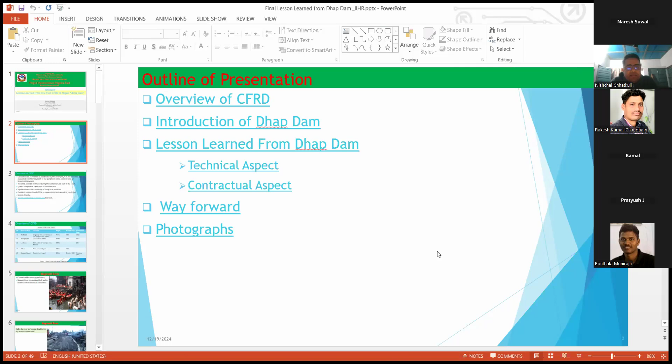Hello. I think Mr. Nishchal is having a technical issue with Zoom. I think he will rejoin shortly. Mr. Rakesh, can you please handle this? Yeah, I think he has joined. Yes.

And in the meantime, we can welcome our guest. Come on.

Okay, I think during his absence, I can briefly introduce our panelists for today's discussion. So the first panelist would be Mr. Naresh Suwal himself.

He's also the prime moderator of the session and a panelist for today's discussion. He holds a PhD, currently pursuing it at Louisiana State University, with research focused on applying machine learning and deep learning to geohealth. He has extensive experience in water resource management, particularly optimization and hydrological modeling. He has published several articles in peer-reviewed journals, most related to multi-objective optimization of reservoir scheduling, so his expertise will be useful in discussing problems related to multi-objective optimization of reservoirs such as the Dhap Dam.

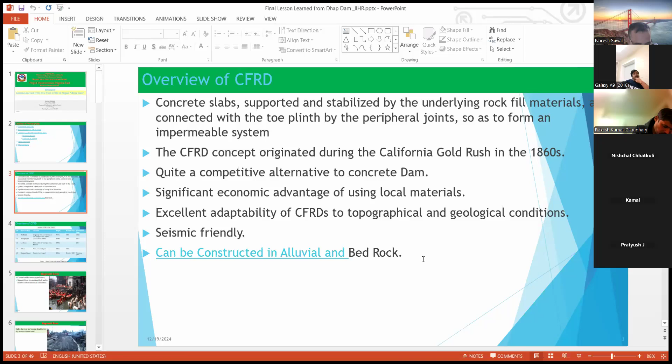This is just an overview of CFRD, which is being constructed worldwide, having heights of more than 200 meters. This is just an example I have shared - a 233-meter high CFRD was built in China, which was started in 2003 and completed in 2008.

Similarly, another dam having 219-meter height was built in China. Another 209-meter dam in Mexico, 205-meter in Malaysia, and 202-meter in Brazil. These are just examples you can find on the internet also.

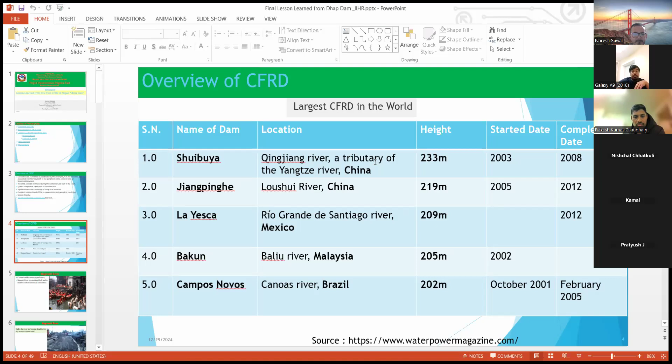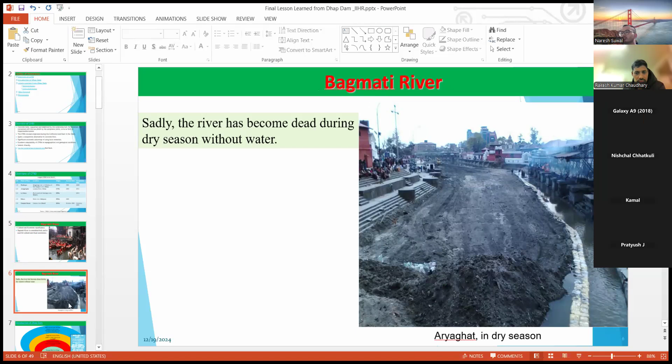To overcome these issues, various efforts have been made by the government of Nepal and other agencies. The concept of the Dhap Dam originated a long time ago. Basically, Japanese water agencies carried out different studies for the water resource management of Kathmandu Valley.

Based on that, the Bagmati Action Plan was prepared and issued by the government of Nepal in 2009, with a time horizon from 2009 to 2014. Now it has been updated, I think from 2022 to 2024, and it is under the approval process from the cabinet.

Based on the Bagmati Action Plan, a pre-feasibility study of the Dhap Dam was carried out by the Danish Hydraulic Institute in 2013. Based on that study, design and construction of Dhap Dam was started in 2015 under the BRBIP, Bagmati River Basin Improvement Project, with loan assistance from ADB.

During the course of this construction, the government of Nepal also issued a water resource policy, which clearly mentioned the augmentation of dry season flow in the river through construction of reservoir projects.

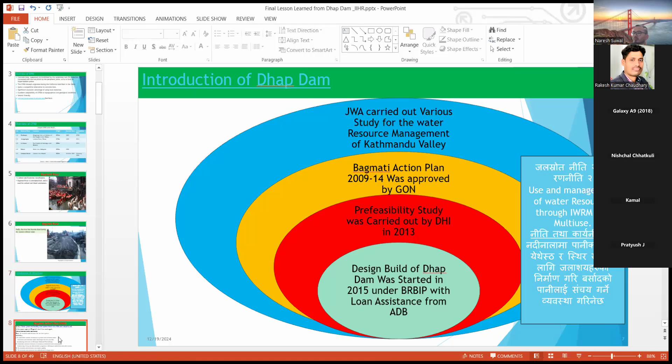This is just the summary of Bagmati Action Plan 2009. The vision is a clean, green, and healthy river system that is full of life and valued by all.

Under this action plan, activity 1 is to undertake various measures to protect and enhance water resources and increase water discharge into the river, like developing reservoirs in Sivapuri National Park.

Based on that, construction of Dhap Dam was started. Another main objective of Dhap Dam is to enhance the water resource and increase water discharge into the Bagmati River in dry season, and maintain and enhance the river water quality.

Another important objective was that during its concept, it was considered as the future backup for providing safe drinking water in Kathmandu Valley.

Immediately after completion of the dam and reservoir filling, we have started water barter between Kathmandu Upatyaka Khanepani Limited and Bagmati River Basin Improvement Project, HPCIDBC.

During the first water year, we have released water from Dhap Dam during the rainy season, because as we know, due to the devastating flood and debris flow in Melamchi River, the tunnel will not be able to deliver water in that period, and the scarcity of water in Kathmandu Valley is obvious.

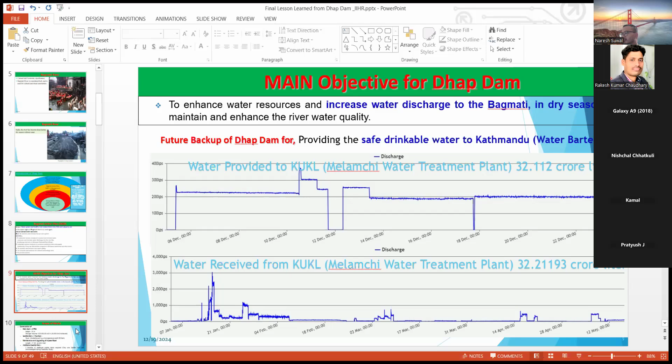This is the scope of Dhap Dam. It consists mainly of a 24-meter high concrete face rockfill dam, and the storage volume was initially 0.85 MCM, but later on, after completion of the dam, there was a sufficient increase in volume of the reservoir. It became 1.42 MCM. There was one saddle dam, since the dam was located on the ridge line between Bagmati Basin and Indravati Basin.

Initially, in the pre-feasibility study, one saddle dam was identified, but later on, while finalizing the topographical survey, the designers team from the contractor side identified two additional saddle dams, which were built by the contractor. We also have a 21-kilometer access road from Sundarijal to Dhap Dam.

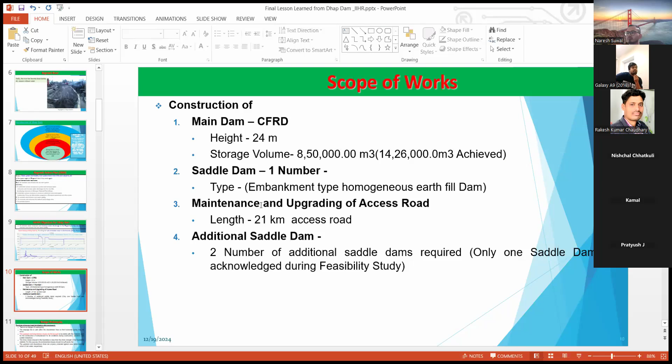The design philosophy of CFRD is that there is no danger of overtopping, and the seepage line is well within the downstream face so that horizontal piping may not occur. The upstream and downstream slopes are flat enough to be stable with the materials used for construction of the embankment under all conditions during construction, operation, and sudden drawdown.

For example, in the case of Dhap Dam, we have provided a 1:1.7 side slope, both upstream and downstream, whereas ICOLD has recommended only a 1:1.3 slope for this type of dam. But for safety purposes, we have provided 1:1.7 side slope.

The shear stress induced in the foundation is less than the shear strength of the foundation materials. For this purpose, the embankment slope should be sufficiently flat.

The upstream and downstream faces are properly protected against wave condition and the action of rainwater respectively. For example, we have provided a parapet wall over Dhap Dam, which will retain the wave back to the reservoir rather than allowing it to overtop.

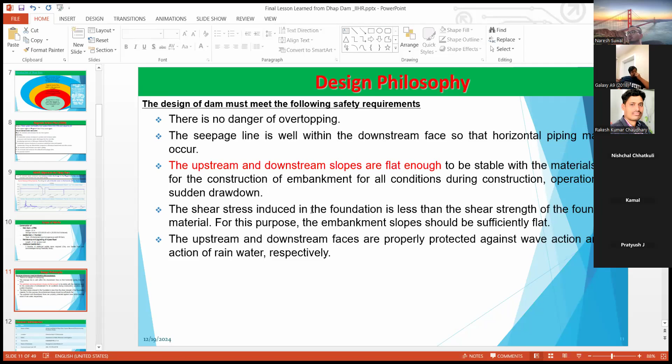This is the contract information about Dhap Dam. It is a design and build contract. The location of Dhap Dam lies in Gokarneshwar 1, Kathmandu, entirely within Shivapuri Nagarjun National Park. The client was the Department of Water Resources and Irrigation, and the contractor was Guangzhou Lama Raman JV. Around 51 crore was the contract amount, including VAT.

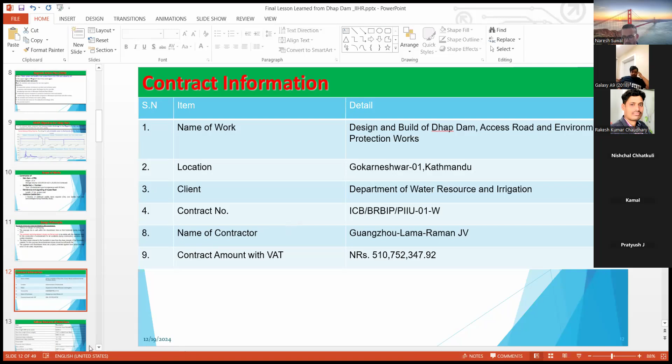This is the main feature of Dhap Dam. Dam height is 24 meter. Top length is 174.7 meter. Crest elevation is 2090.14 from mean sea level, and crest width is 8 meter. Thickness of face slab is 300mm, and dam volume is around...

51,000 cubic meters, but later on, due to increase in dam length, the volume increased. Normal water level is 2087.14, and freeboard is 3 meter.

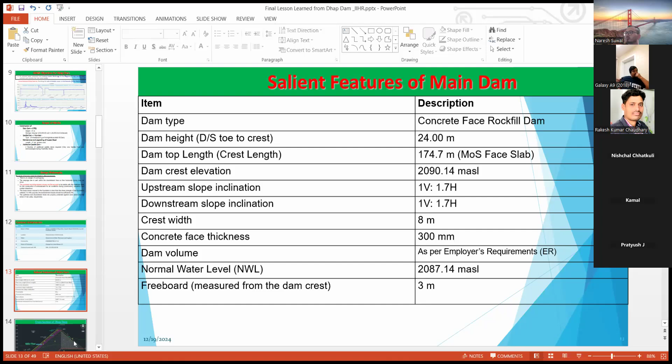This is the typical section of CFRD, where you can see the face slab in water face. This is the face slab.

This is the plinth level, and this is the ground profile. The main concept of CFRD is we need to have a competent bed to lay the plinth slab. As you can see here, there is deep excavation, and as you go towards downstream, you can see there is a slight decrease in excavation. So we can compromise the grade of rock while going downstream, but at the upstream where we are going to lay the plinth slab, the rock should be competent in strength.

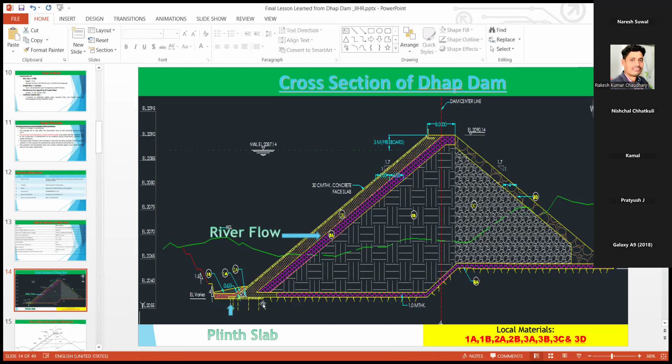These are the different phases which have been proposed during the construction. As you can see, from phase 1 to phase 7, because to optimize the resources and to materialize the design in an optimum way, this phase was developed, and to ease the construction also.

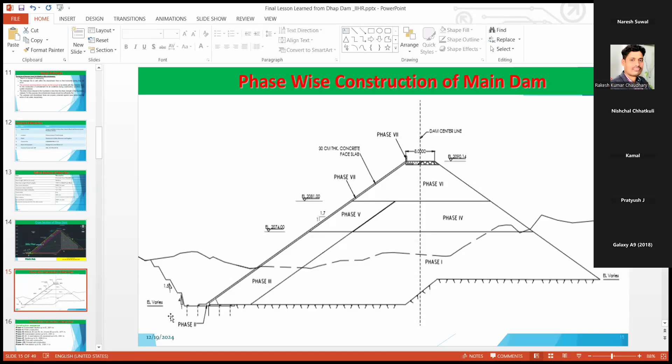These are the different activities that have been carried out under different phases. You can see from phase 1 to phase 9. So I'm not going into detail.

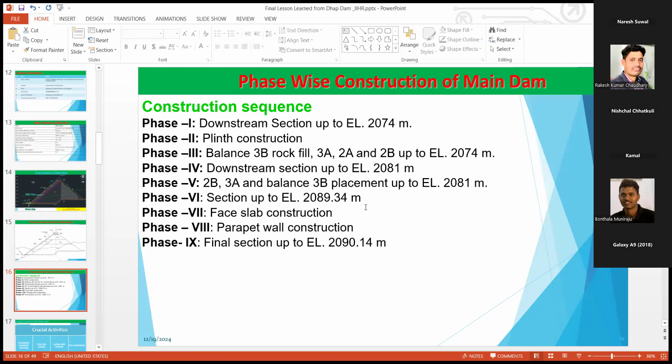Now I'm coming to the main topic of this presentation, lessons learned from Dhap Dam. In this slide, I'm going to highlight the technical aspect. In this aspect, the crucial activities that have been carried out are the foundation treatment, which is called grouting, similarly face slab casting, laying of joint networks, and instrumentation.

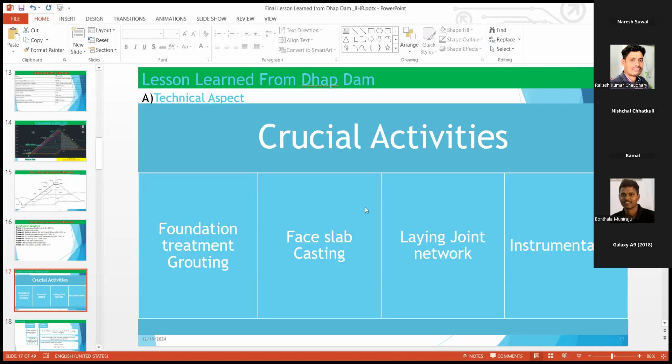Now coming to grouting, we have two types of grouting. One is consolidation grouting, and another is curtain grouting. Consolidation grouting mainly deals with the bulk property of the rock, and up to 5 meter depth we have applied consolidation grout in 2 rows, with hole spacing varying from 8 to 2 meters.

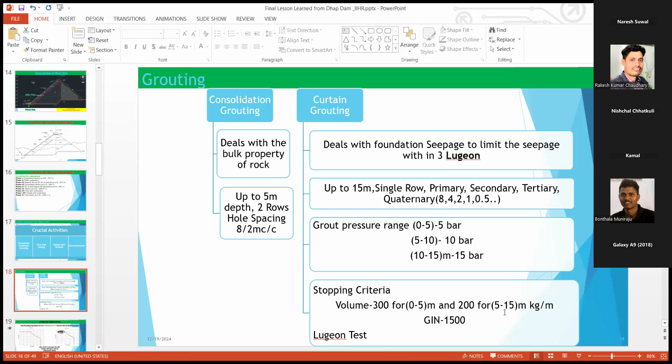Grout pressure was ranged at 5 bar for 0 to 5 meters, 10 bar for 5 to 10 meters, and 15 bar for 10 to 15 meters. The stopping criteria was based on volume: 300 kg for 0 to 5 meters and 200 kg for 5 to 15 meters. The grouting intensity number was 1500. A Lugeon test was carried out to confirm the permeability within range.

This is the envelope developed for the grouting, especially for curtain grouting. As you can see, grout volume on the x-axis and applied pressure on the y-axis. This envelope shows the characteristics of the rock. As you can see here, this shows the rock having fewer fissures, while this side shows the rock having more fissures.

In this area, we will control the grout take by volume, whereas in this area we will control the grout take by pressure.

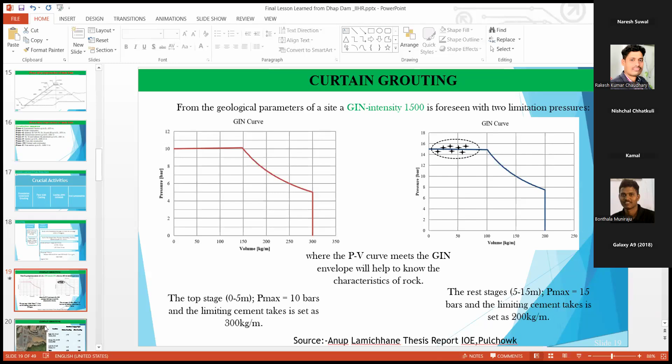This is the prediction of the grout performance. This research was done by Anup Lamichhane. At that time, he was a master's MSc student in geotechnical engineering from Pulchowk Campus. He carried out his research on Dhap Dam entitled 'Seepage Characteristics of Dhap Dam', and he predicted the grout performance before and after grouting, focusing mainly on three regions.

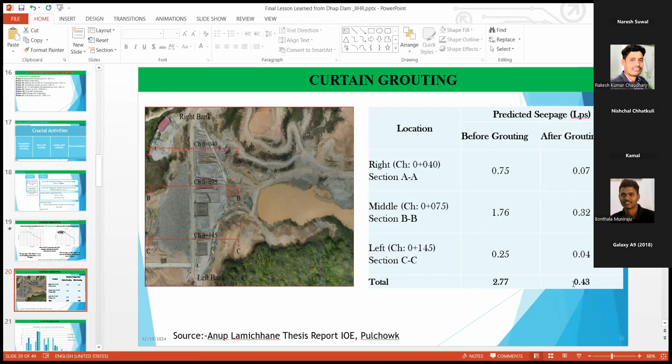Chainage 40, 75, and 145. This was the predicted seepage before grouting, and this is the predicted seepage after grouting. This graph was also developed by Anup. I would like to thank him. Now he's in the USA doing his PhD.

Here you can see the profile of Lugeon value. As you can see, we have the least Lugeon value before grouting in the right bank and mid section, whereas we encountered the maximum Lugeon value in the left bank and mid section. We recorded maximum Lugeon value up to 100 in the left bank.

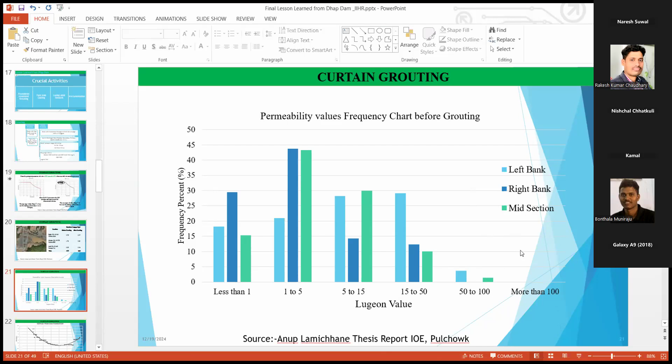This graph was developed by our office based on real seepage measurement downstream, from a device installed by the contractor at the toe of the dam. This seepage data was measured manually by our PIU team, and as the graph shows, there is minimum seepage in the month of March. This is the real seepage. There is increment in seepage before and after the dry season because of contribution of runoff from the vicinity of the dam and dam body, and there is no runoff during March. The real seepage is around 1 lps, which is considered safe as suggested by the experts.

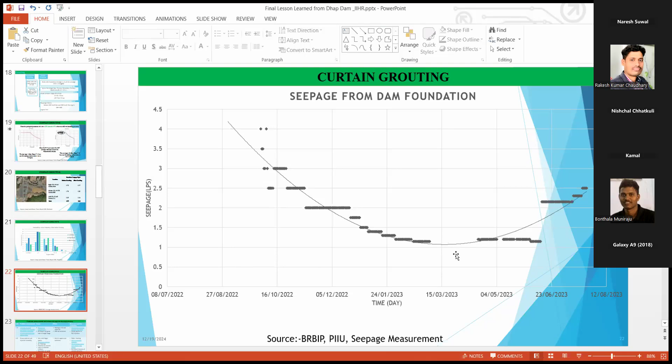Now coming to the various problems encountered and measures applied to resolve them during grouting. The first problem was leakage of grout material outside the plinth, at the interface of the rock bed and the plinth, and nearby holes. The main cause was removal of overburden, because due to difficulties in excavation by machine, the overburden between the border of the plinth line and existing ground was slightly removed.

From that portion, the grout exited out. Also, initially we drilled all grout holes at a single time, which was another main cause of this problem. The effect was wastage of grout material, because to achieve the desired Lugeon we couldn't compromise on pressure and volume, so a lot of material was wasted, and the required grouting intensity number was not achieved.

The main measures used for resolution: overburden was applied outside the plinth slab, we laid concrete in the open excavated portions, and grouting was applied in primary, secondary, tertiary and quaternary holes. We also reduced the spacing of grouting from 8 meters to 0.5 meter.

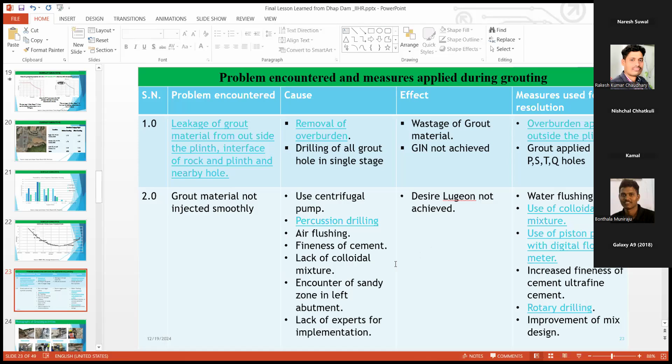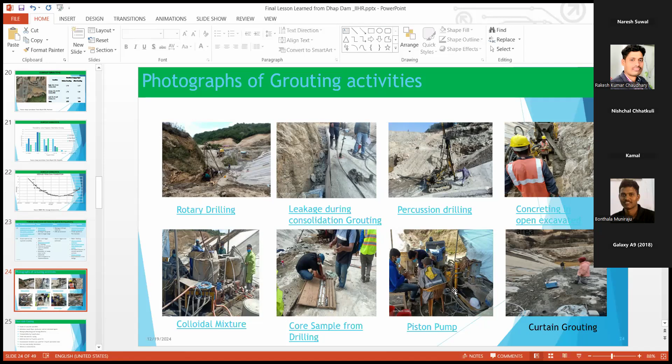As mentioned, this is the open excavated portion from where grout material exited. To overcome this problem, we applied concrete, pouring it in this area. This is the rotary drilling, and this is the percussion drilling which was initially used, later replaced by rotary drilling. This shows the concreting in the open excavated portion, and this is the colloidal mixer. This is the core sample taken from the grout hole, this is the piston pump used with a flow meter, and this figure shows the curtain grouting.

Now coming to face slab casting: the grade of concrete was B25, equivalent to M31.5 in British standard, having cylindrical strength. The admixture used was super plasticizer and air entrained agent. Mixing was done by a batching plant with a capacity of 25 meter cube per hour, transportation was done by transit mixer, and chute was used for laying the concrete. We used slip form for 9 panels out of 12 panels, and fabricated the slip form locally — I believe this was the first slip form used on an inclined surface in Nepal.

Conventional formwork was used for 3 panels and the starter slab. The starter slab is the slab cast in the irregular portion of the dam, because the dam was constructed in the river valley, which is not regular. For the regular portion, we used slip form, and for the other portion, we used conventional formwork by constructing the starter slab.

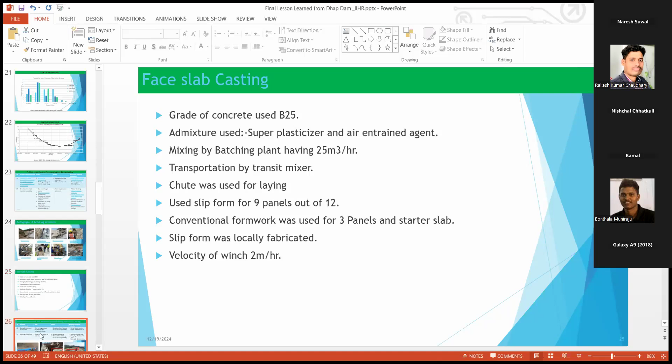Now coming to the problems encountered and measures applied during face slab casting. The main problem encountered was unequal movement of the slip form. The main cause behind this was use of a single winch and inappropriate alignment of the rail, which reduced the efficiency of the slip form significantly. For resolution, we used a double winch and made the rail alignment proper.

Another problem was uplifting of the slip form. The main cause was insufficient weight of the slip form itself, since initially we designed it to be lightweight in order to optimize the weight of metal. The effect of this problem was surface undulation in the concrete face, and reduced efficiency of the slip form. As a resolution, we added dead load to the slip form, as you can see the concrete block here.

We clamped the rail and slip form, and the movement of the slip form was slightly modified. Initially, the slip form was designed for continuous movement at 2 meters per hour velocity, synchronized with the initial setting time of concrete. Later, due to this problem and due to fall in temperature, it was very difficult to attain the initial setting time, so we modified the slip form movement from continuous to intermittent movement.

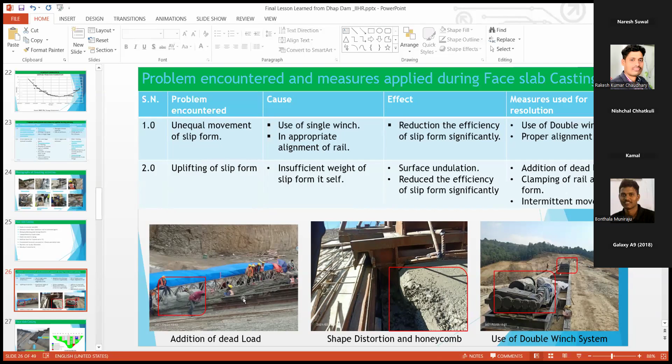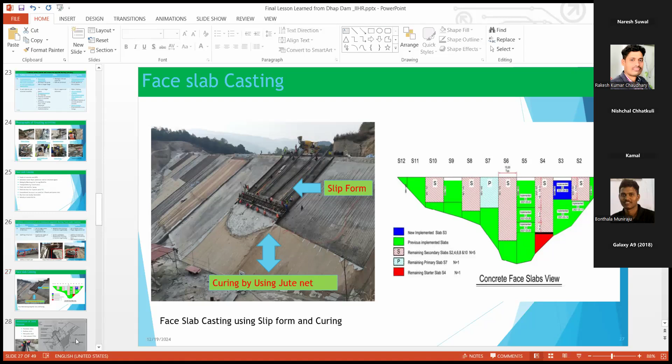Now coming to installation of the joint network, in Dhap Dam we have different types of joints. One is the perimeter joint, another is the vertical joint, and the last is the horizontal joint. Altogether we have a 733-meter joint network.

As I have already mentioned in my initial slide, the perimeter joint was constructed between the dam body and the foundation plinth slab. The vertical joint was constructed between two face slab panels, and the horizontal joint was provided between the face slab and the parapet. The function of the parapet is to return the water wave back into the reservoir, rather than allowing overtopping.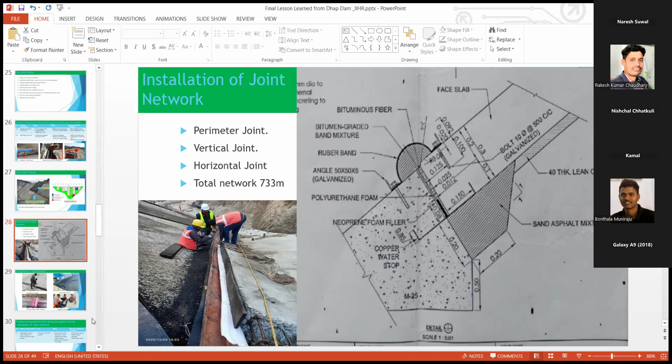Now I want to highlight the different activities during joint network construction. As you can see, the fixation of the angle and the rubber band. This is the completed part of the joint, and this is the joint construction phase. This is sand asphalt laying, and this is the W shape copper water stopper, and different stoppers were connected to each other by brazing technology.

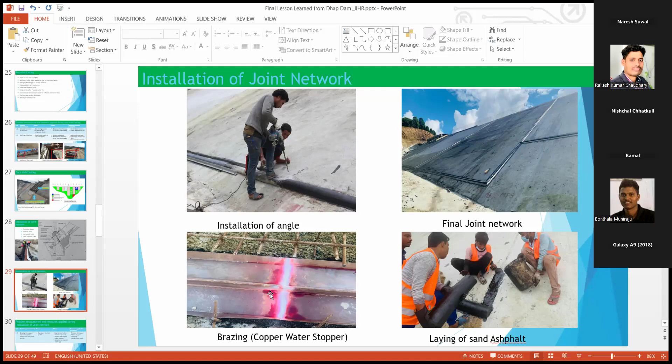The thickness of the copper water stopper was 1 mm. As suggested by code, we could use 0.8 mm thickness, but for this height of dam, we used 1 mm thickness copper water stopper.

The main problem encountered during joint laying was bending of the copper water stopper to match the plinth profile, because the plinth profile was aligned according to the shape of the valley, and there was a curvature in the plinth profile. The effect was a gap formed at the interface of sand asphalt and copper water stopper, and intrusion of concrete from this gap. The resolution was pressing the copper water stopper by applying compressive load, and the gap was fulfilled. Since the copper water stopper is a ductile material, we were able to fix this problem.

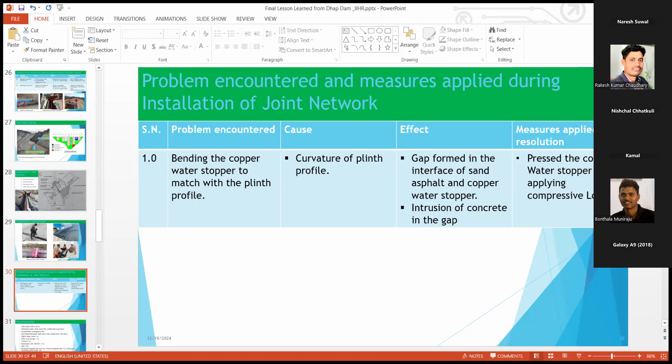Now coming to instrumentation, we have different types of instrumentation. There is joint meter, perimeter joint meter 4 numbers, and joint meter 4 numbers, and settlement points. We have 6 settlement points in the main dam, and 6 in each saddle dam, and we have 2 strong motion accelerographs.

One was installed at the dam crest, and another in the vicinity of the reservoir. We also have standpipe piezometers, 2 in the main dam and 1 per saddle dam. And we have a digital water level gauge and 1 water level gauge.

And we have installed a V-notch for seepage measurement from the foundation, installed in 1 of the dams. We also have a rectangular weir with RLS made at the downstream of the reservoir for measurement of the spill as well as the release. And we also have 1 automatic weather station set up in the vicinity of the reservoir.

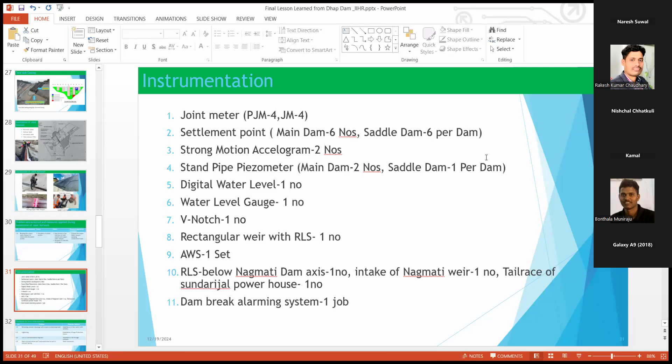Now coming to different problems related to instrumentation: we are releasing constant discharge with respect to declining head because currently we just have the Howell-Bunger valve. In this valve we control the flow discharge manually, and the probable solution is installation of a flow meter with actuator. We have discussed this many times with ADB and other experts, but they suggested this sophisticated instrument is not required for such a small dam.

Another problem is lightning. Because of lightning there is frequent damage to instrumentation; the probable solution is installation of surge protection devices. Another problem is lack of instrumentation engineers, because in government entities such manpower is not provisioned, so deputation of an instrumentation engineer through contract is essential.

Another problem is data communication and transmission due to lack of internet facility, because the dam lies entirely in the park area and there is no reliable network of telephone and internet. To solve this problem, we are discussing with Nepal Telecom for installation of an NTC tower there.

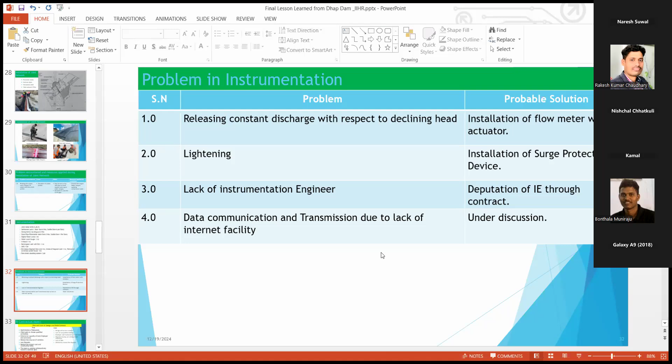Now I have concluded the technical aspect, coming to contractual aspects. This is the pros and cons of design build contract, where the pros are optimization of resources, client gets to choose qualified contractor, enhanced capacity of local employer and contractor, reduced chances of variation, fewer disputes, reduced project cost and construction time, and the team working collaboratively towards a common goal.

Cost of design is comparatively less than individual design, whereas the cons are design will be less creative, because the contractor will try to optimize resources and use less input for the design, since every private sector wants to make profit. With fewer resources used for design, creative design will not be achieved. There is also a lack of competitive bidding, because we have very few competitive contractors for this type of contract.

Employers and contractors are less familiar with each other, because we have faced many problems during construction of this dam, and we have taken input from different experts across the world, and have to depend heavily on the design build contractor. There is also a lack of standard bidding documents for this type of contract, and it's difficult to resolve disputes, because during construction of Dhap Dam we still have a couple of disputes under the process of resolution from the Supreme Court.

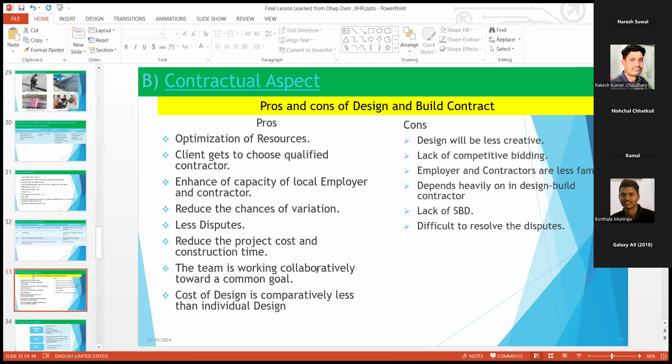The main problems faced during contract management were site possession, variation, price adjustment, and changes of designer and engineer, because during the course of contract management there was replacement of the engineer, which was very difficult for us to implement the contract. The main cause behind this problem was delay in approval of tree cutting, ambiguity in contract documents, and ad hoc decisions from the oversighting agencies.

The effect was time and cost overrun and disputes arising. Measures applied for resolution were EOT (extension of time) granted, and price adjustment was applied as per contract. The dispute resolution mechanism was functional during the contract management phase.

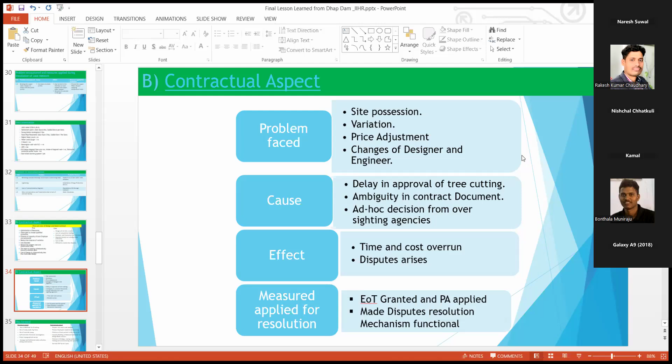Now I'm coming to the way forward. For the technical aspect, following are the ways forward from our side based on our experience and lessons learned from the Dhap Dam. One is the use of GIN plant for grouting. GIN plant is a very sophisticated plant used for proof grouting.

The main function of this plant is to optimize the grout volume, and the efficiency of grouting will be achieved by using this plant. Also use of ready-made slip form, use of concrete form, and sufficient geotechnical investigation, because this investigation makes it easy for us to optimize grouting, other foundation treatment, and design.

And proper topographical survey, because in the park area we were not able to conduct a proper topographical survey during the feasibility study. Due to that reason, later on while designing the dam, two additional saddle dams were encountered, and the contractor has also built those saddle dams, but that issue was under dispute and in the process of resolution.

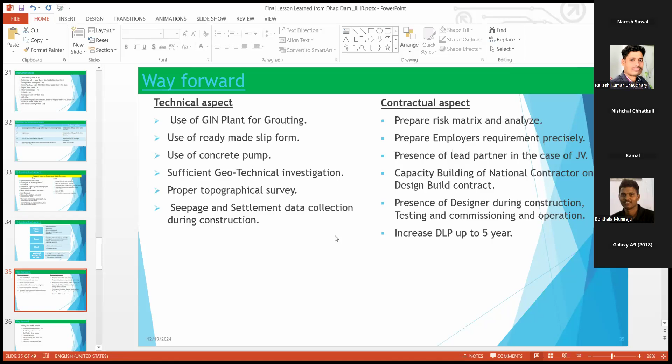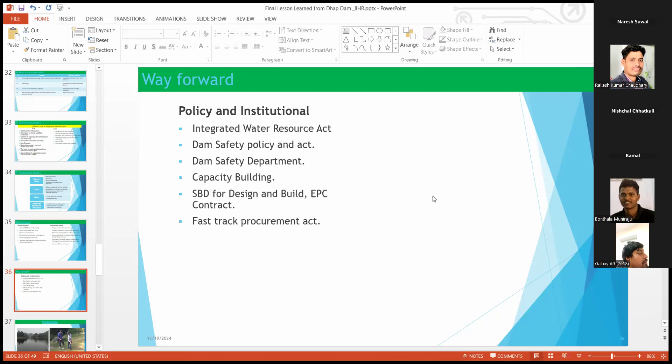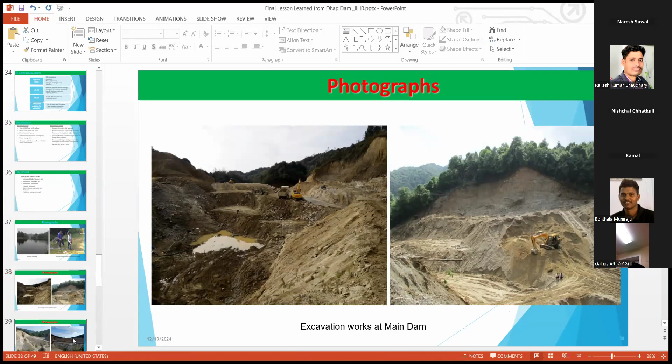This photograph was taken during the foundation, and you can see the progress of the dam. And this is 3A materials, this is 2B materials, and you can see the different stages of the construction. And this is the plinth slab.

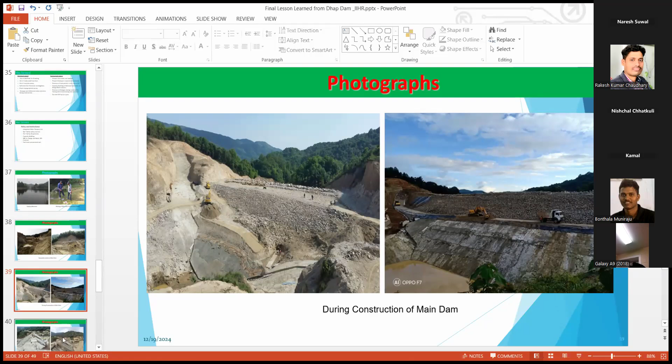This is the temporary diversion. This is permanent release, permanent outlet, and where you can see the casting of foam. This is the spillway.

These are the different face slab panels, and you can see also the joint networks, as I have already mentioned in my previous slide. Here you can see the final shape for the first CFRD of Nepal.

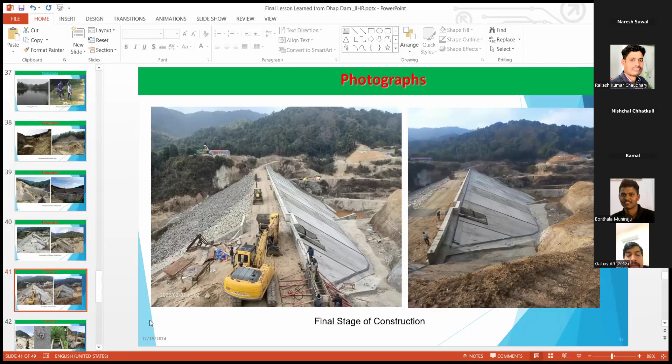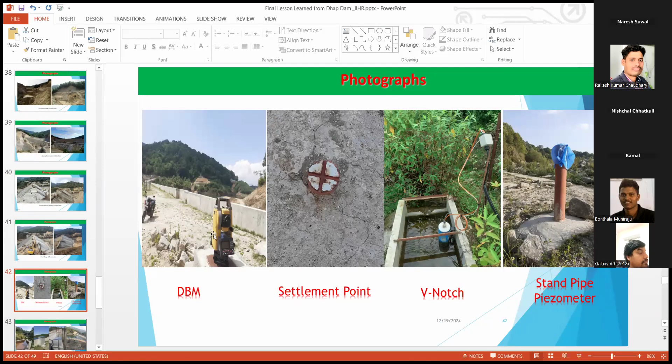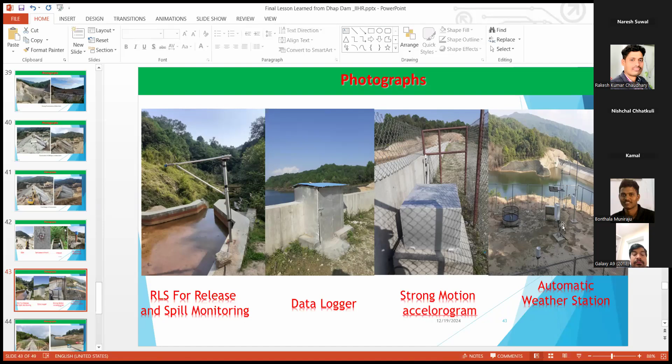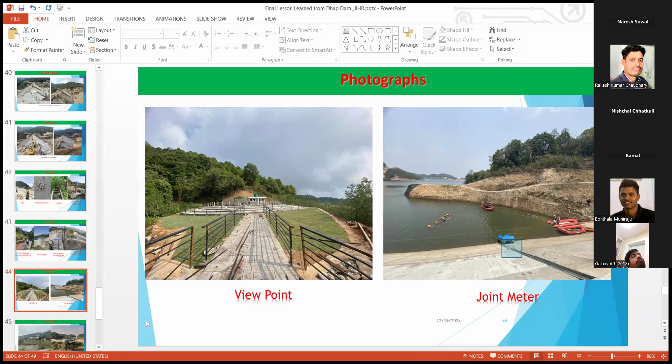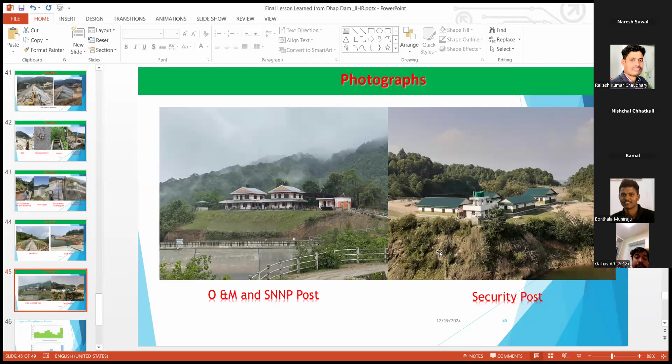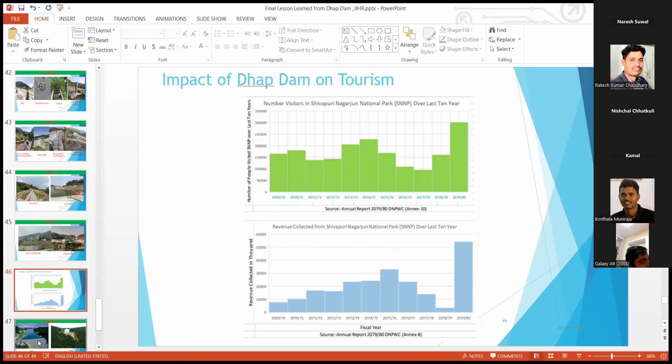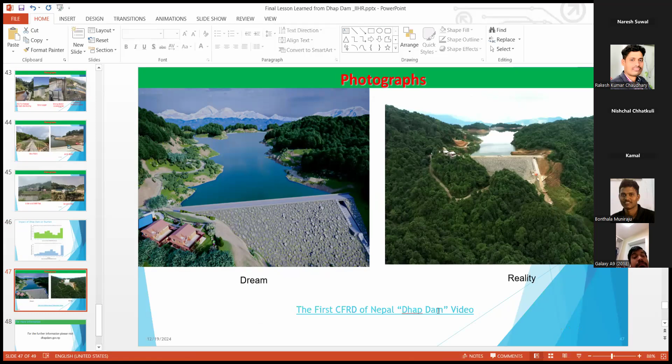Okay, thank you, Mr. Nishchal. That was quite an amazing presentation. We learned a lot from your presentation, and thank you for explaining in detail the technical aspects as well as the retaining issues related to the contractual agreement in such a big project. And it is one of the first and unique kinds of project in Nepal.